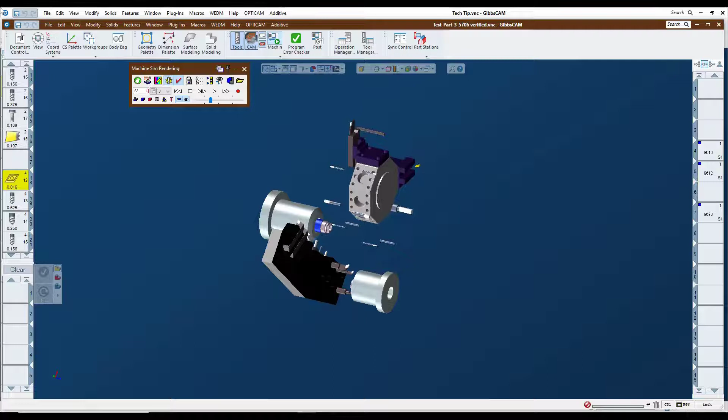In today's GibbsCAM Tech Tip, we're going to be looking at setting up tool blocks in your machine simulation to better assist you in getting your tools into position correctly, as we see in this simulation here with some of the tools just floating out in space as we have to put dimensions on that positioning. So we're going to close this file out and we're going to get started on our tool block here. And this is going to be a quick overview as to what is necessary in order to accomplish this.

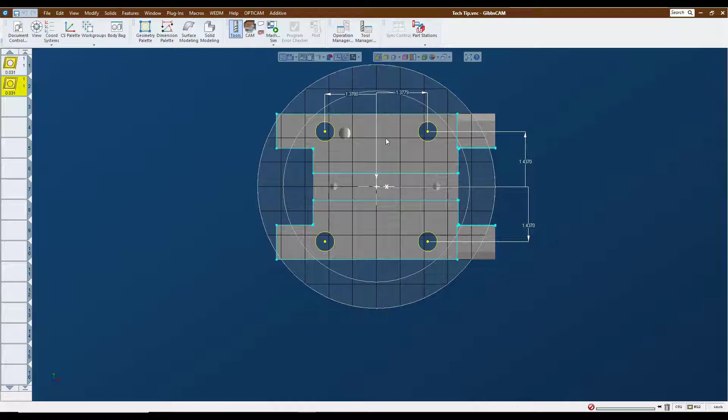So we have our tool block here sitting in our view. We look at the XY coordinate system and we make sure that the tool block is positioned accurately to the center line of the turret. So we have our dimensions here and we see that we are positioned here accurately. We're also going to look at making sure that the height of the tool block is correct, which we see that this one is not quite right yet.

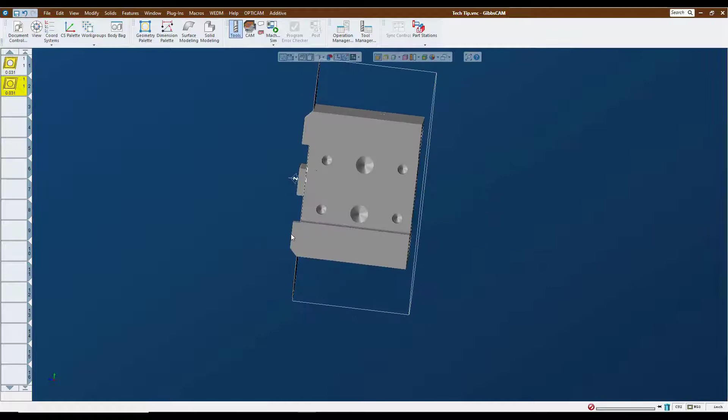We need this face in contact with our turret face. So we're going to make a small move in that using our absolute translate, and we're going to tune that block up into its position here. So now it's sitting on its surface there. So now on the other side here, we've got also some predetermined geometry.

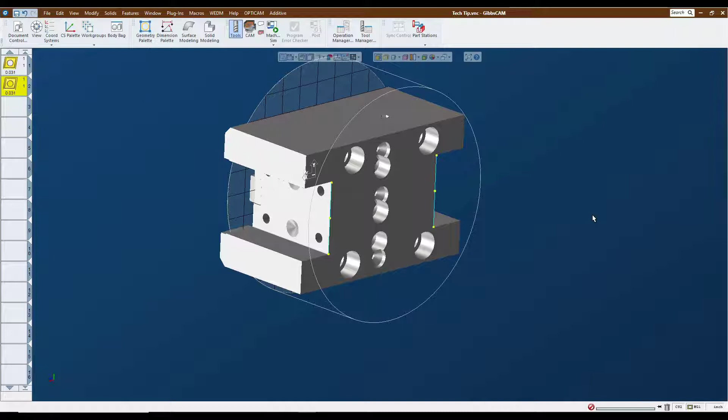And in that, we're going to be utilizing the center line of these two lines here to position our attachment point coordinate systems. So I'm going to grab that line there, go to my geometry palette, and put a point in the center of that line. And then I'm going to do the same thing with this line over here. So those are going to be our coordinate systems for where our tools are going to be sitting for the left and the right hand side of this turret.

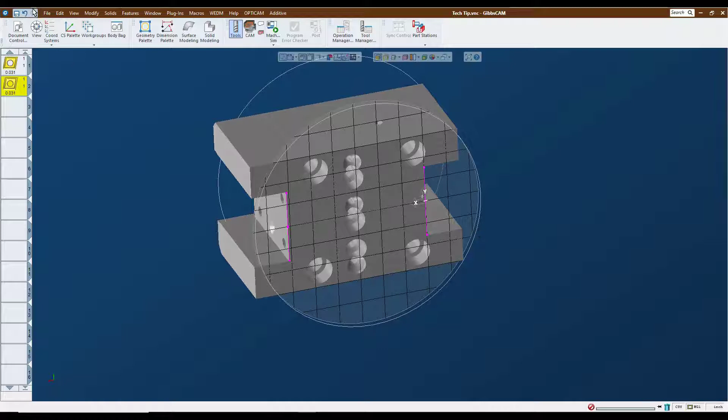I have a couple of coordinate systems set up here that I have already predetermined for those two positions. So here is our left hand turning tool facing the main spindle. Here is our right hand turning tool facing the subspindle. So now with all of that information ready to go here, we can go to our intermediate tool block library, and making sure that we're on the right machine here, we can start assigning our tool block. So we see our new tool block populated and ready to go.

So I'm going to click on my block here, and I'm going to go to the root and I'm going to add a simulation body. And we're going to call this my double turn block.

Okay. Apparently not typing so well today.

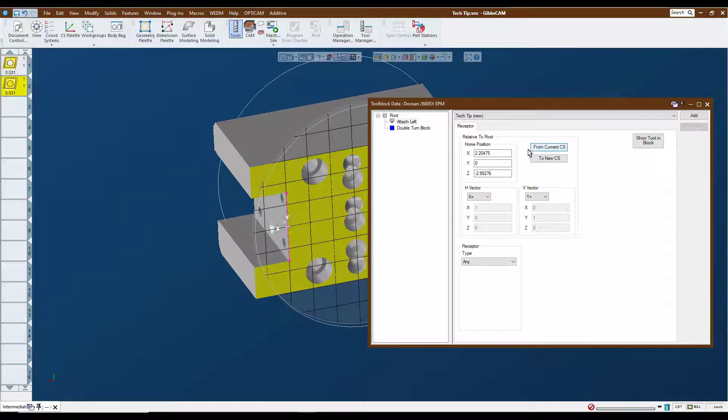Alright, so now the block is assigned, so now we need to assign the two connection points for it. So what we're going to do is we're going to activate the left-hand connection point, and we're going to click on the root again, and we're going to add a receptor, and we're going to call this attach left. And since that coordinate system is active, I just need to click on From Current CS, and it assigns our vectors and our X and Y coordinates and Z coordinates as to where that position is.

So then we need to add the other attachment point for the right hand. So we activate that coordinate system, go to the root again, and add another receptor, and we're going to call this one attach right. And again, we're going to click the From Current CS, and we're ready to go.

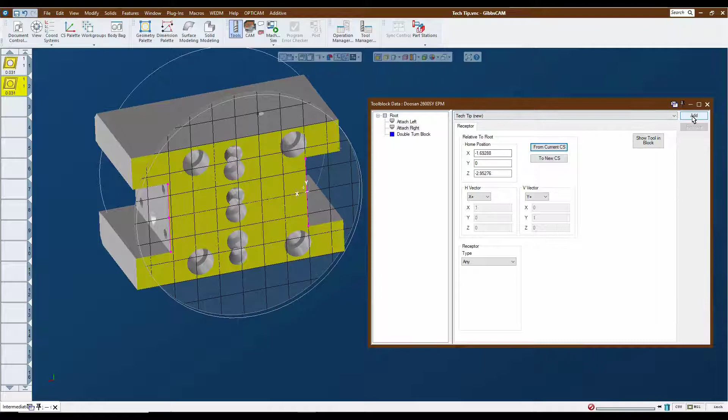So now we've got our vectors and everything correct there, so now we can just go ahead and click on the add, and what it's going to do is flash the screen and write this thing into the intermediate tooling library. And we're about ready to go here, and we're back to our file, and now we see a tool block that is ready to be used.

So now that we have our tool block set up, now we can load our tools into our tool block. And I'll take the first turning tool here that's on the left. We'll put that in the tool block. And here's my tool block right down here. And we'll go ahead and close that out and put that in the attach left position.

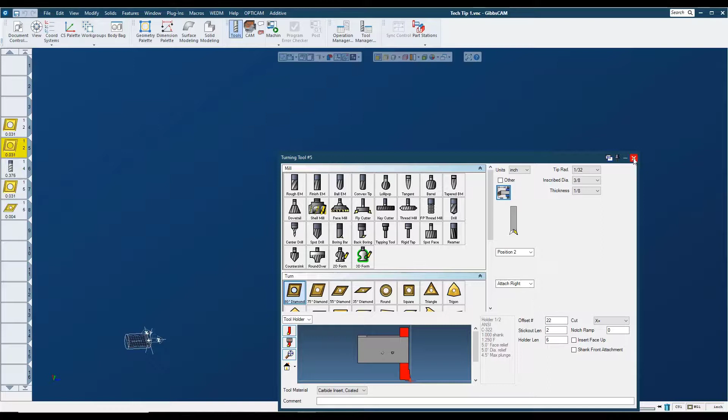And then we can go to our second turning tool, which is on the right hand side. And we'll put that in the attach right position. So with those tools in the tool block, we can go to our machine sim and we'll see them here in the simulation.